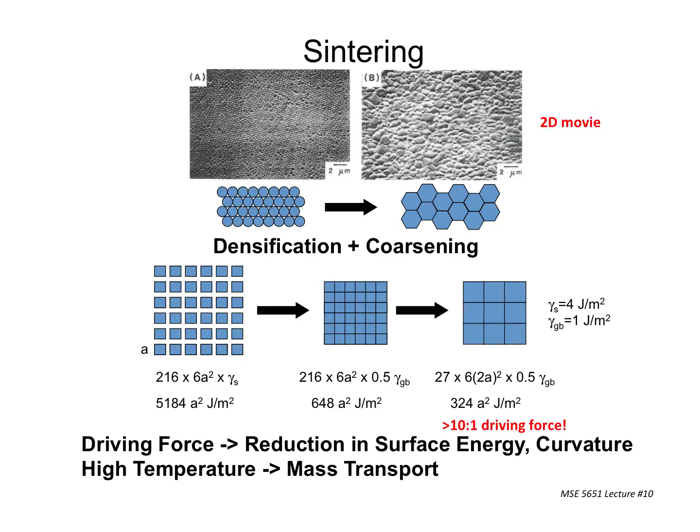We'll talk about some examples of that. But first, I'm going to talk about the driving forces again, in case you're at all unsure about this. This is an array of what's called Stober process spheres—tiny silica spheres made by a particular chemical process. As you can see, they're all the same, and they're all really tiny, which is pertinent to what we're talking about in this class.

They're pretty much close packed. If you have the right level of dispersion—and we all know about dispersions now and how we achieve them—you get these types of arrays of really tiny silica particles, and you can use this to make synthetic opal. If you're ever so inclined to make jewelry this way, you can. Opal is a similar thing; nature makes it and it takes a really long time, but we can do this synthetically.

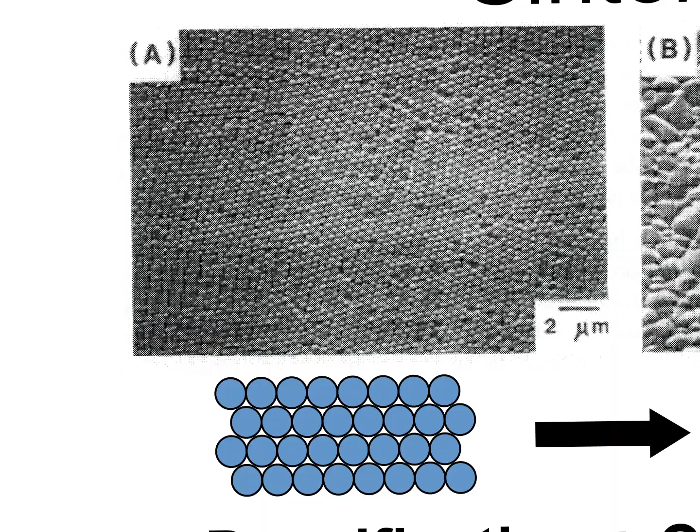The reason I show you this is that we have this close packed array of particles. If anything, this should give you what you'd expect, which is the equilibrium distribution of grains—you get six-sided grains in a perfect close packed array of particles. But in reality, you don't get that. You get this instead.

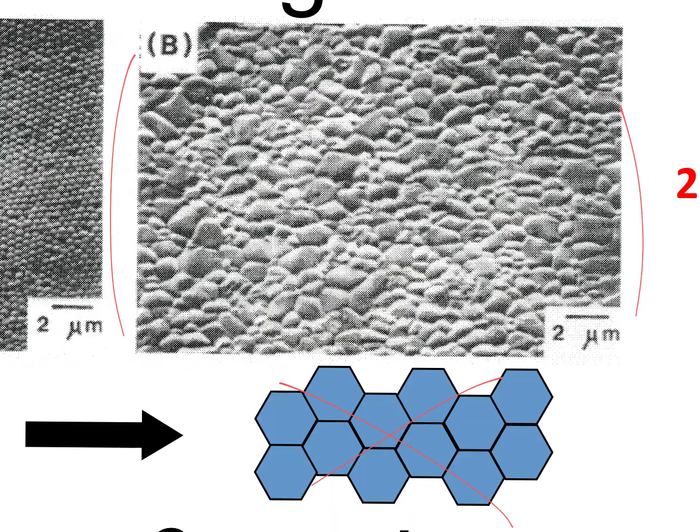As you can see, it's the same story. Now you've got several things going on. First off, you're not getting six-sided grains. Secondly, the grains are all different sizes—they didn't start out that way, but they certainly ended up that way. Some are bigger than others, so they're starting the process of gobbling up the little guys in this microstructure. So even if you do everything perfectly, starting with spheres and heating them up, you're not going to get what theory might tell you—you won't get six-sided grains, and you'll still have lots of grain growth because not all grains are the same size.

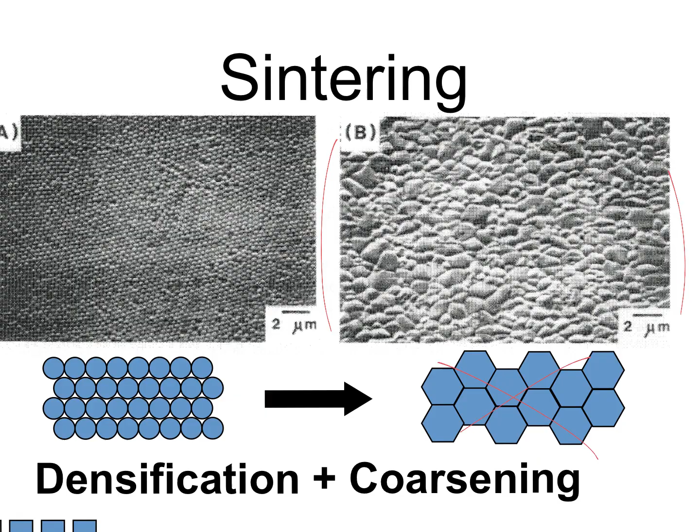That's just an inherent part of the process. What's driving all this is a thought experiment: we have a 6 by 6 by 6 array of cubes, totaling 216 cubes, and each cube has an area of 6a squared, 6 sides.

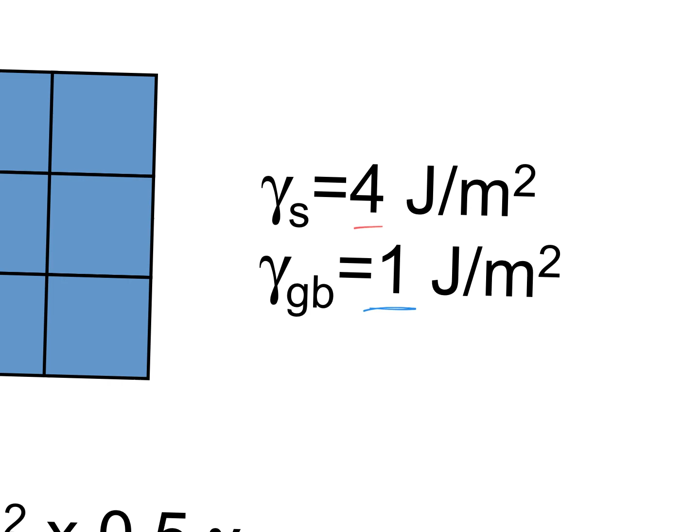We think about gamma as the driving force. For this experiment, gamma for the surface itself is 4 joules per square meter, and for the grain boundaries, 1 joule per square meter. These are realistic numbers in terms of how things scale in real processes. So we start with this array of cubes, and gamma sub s, 4 joules per square meter, is the driving force for this 6 by 6 by 6 array.

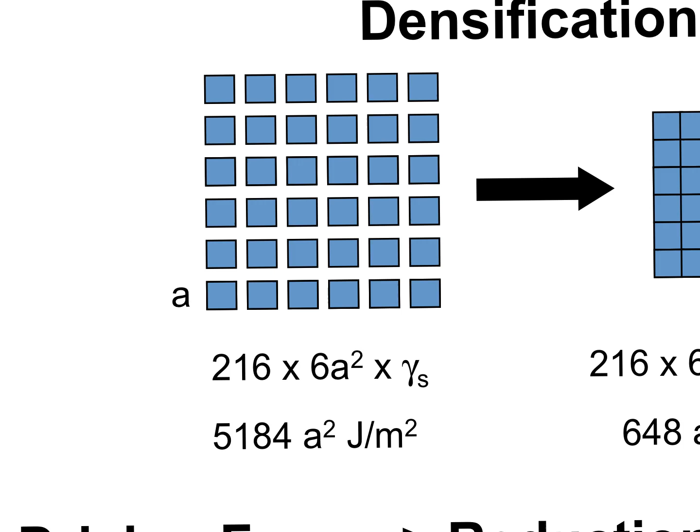If we look at the math in terms of a squared, it's 5,184 joules per square meter. That's just sitting there floating in space—the cubes aren't touching each other.

Now we bring them together, making an assembly instead of individual floating cubes. We still have 216 cubes in this array, and they still have a surface area of 6a squared. But now we're not looking at gamma sub s anymore.

Gamma sub s has been replaced by gamma GB. We made these grain boundaries by putting the cubes together, and we also have half the surface area because now they're sharing those a squared areas.

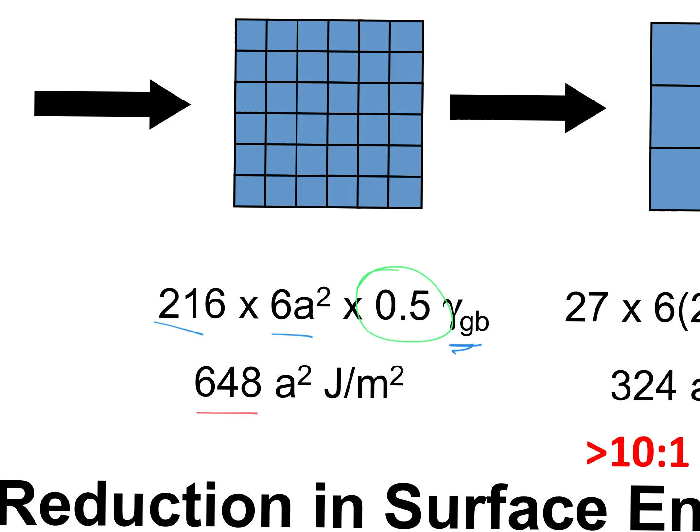That has allowed us to go from 5,184 down to 648. So we've already dropped the surface area quite a bit just by bringing them together, going from solid-surface-vapor interface to grain boundary interface, where two grains face each other across this interface. We've done no grain growth in this simulation—there's a huge driving force just to get rid of surface. That's what this is about.

Then we finally allow grain growth to occur—I put it in quotes because they're still cubes, which is unrealistic. But now you've got a 3 by 3 by 3 array instead of 6 by 6 by 6. So we've made this 27 times 6 times 2a squared, because now they're twice the size of what they were before.

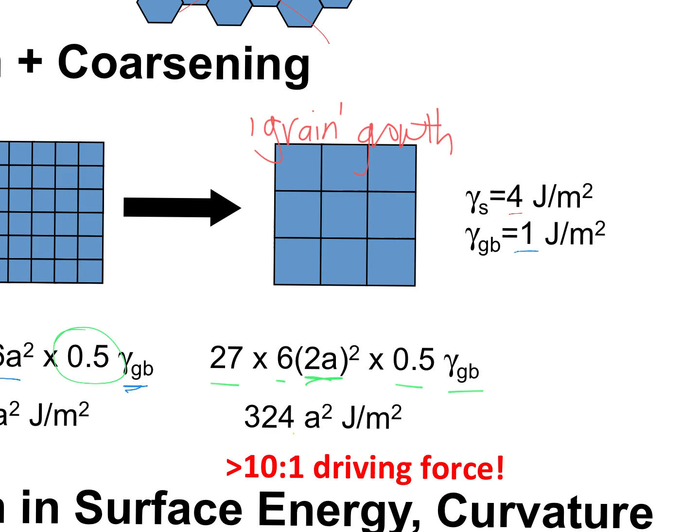Still 0.5 times GB, and it's now 324 a squared joules per meter squared—actually a 16 to 1 driving force, more than 10 to 1. So there's a huge reason for this transformation: first, a huge reason to become grain boundary interfaces rather than surfaces, and then another driving force to eliminate those grain boundaries and reduce their number in the system.

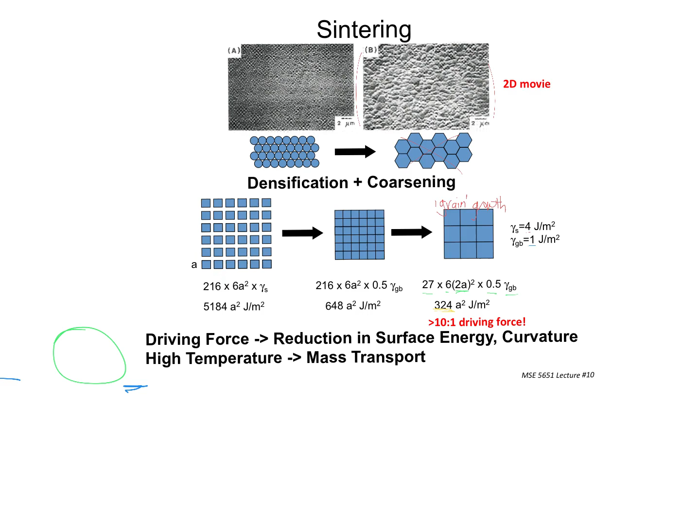This is what drives the process forward: reducing surface area, curvature, and high temperatures allowing mass transport, allowing grain boundaries to grow as they jump across that concave-convex barrier, and grain growth is achieved. This gives you a good idea of what happens in these systems, and it is energy driven.

An example: if you take some of these nanoscale arrays and drop them in a furnace at 1500 degrees, their temperature will go above 1500 degrees because you're liberating all that energy, showing up as a temperature increase of the mass. It's a terrible way to make a ceramic, but it shows there's energy locked up on these surfaces, and that energy can be liberated when you undergo these microstructural changes.

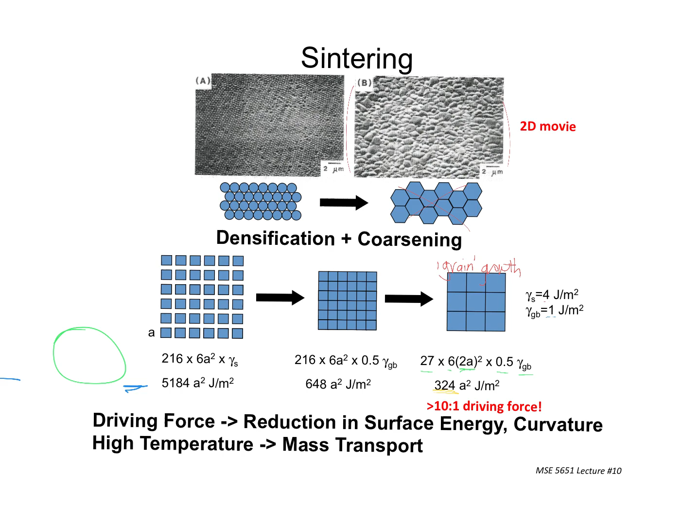Any questions about that? That should all make really good sense at this point, hopefully.

To review, we know there are different pathways for this—this is the classic three-sphere Ashby diagram, involving vapor transport, surface transport, and transport within the solids themselves. The one additional wrinkle is dislocations that are moving things around. In ceramics, dislocations are of no importance whatsoever, except maybe for MgO or something like that.

But it's just one more pathway to move atoms around. So this is what we're looking at, and we're really concerned about this center-to-center distance, the center of the joint between the two, and what are those distances, and how can we make those distances shrink. We want the spheres to come closer together, which means the whole thing is now densifying.

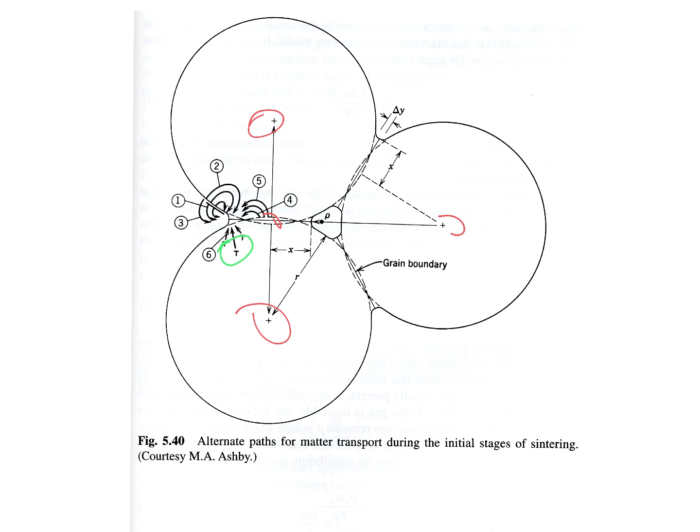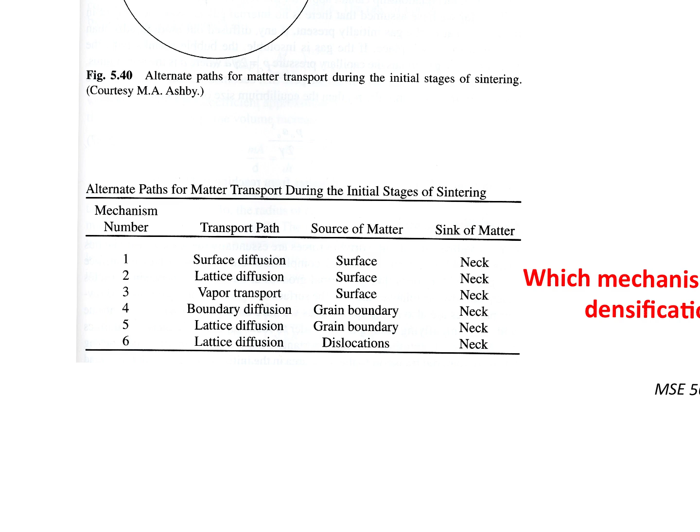What we've got is a series of mechanisms, 1 through 6: surface diffusion, lattice diffusion, vapor transport, boundary diffusion, lattice diffusion, the source of the matter and the sink of the matter. The sink for all of them is a neck. You want to put stuff in that neck to take advantage of the fact that it's a concave area. We have 6 of these — which mechanisms actually allow for densification?

Anybody want to guess? Or which don't? Maybe we'll start there, it's an easier thing to answer. Which don't allow for densification, which don't lead to densification of those 3 spheres?

Which number? Give me a number. 2? Okay, yeah, so 2 does not allow. You're taking it from the surface and you're transporting it to the neck, but you're not shrinking the space. So you're taking surface and putting it into the neck area. All you've done is made that surface smaller, but you haven't caused the spheres to come closer together.

Does that make sense? So on that note, we also have surface diffusion from the surface, so it moves along the edge here and ends up in the neck. It's happening all over the place, but none of those are causing the centers of those spheres to come closer together.

And the same thing is also true for vapor transport. If it goes out into the vapor and then sits down in the neck, that's not causing those spheres to come closer together. You're eroding the surface, but you're not bringing those crosshairs closer together. Does everyone see that? The only ones that work are 4, 5, and 6.

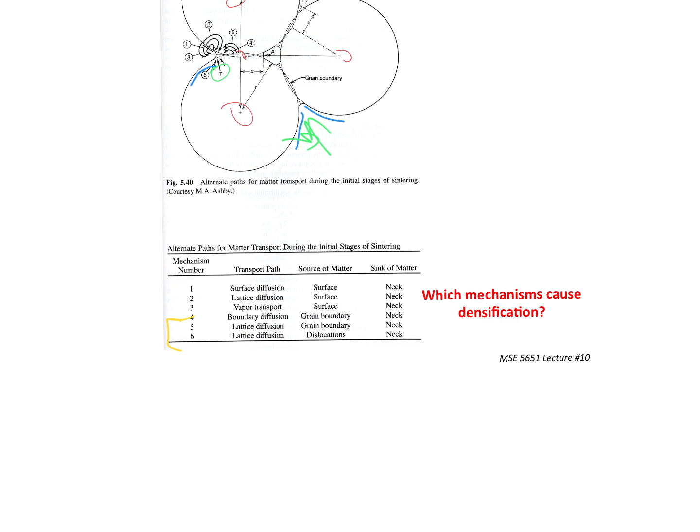So we're diffusing along the grain boundary, and in doing so — let me go back to this overall picture and clean this up a little bit — diffusing along the grain boundary, which has just been formed, and you're going to that neck.

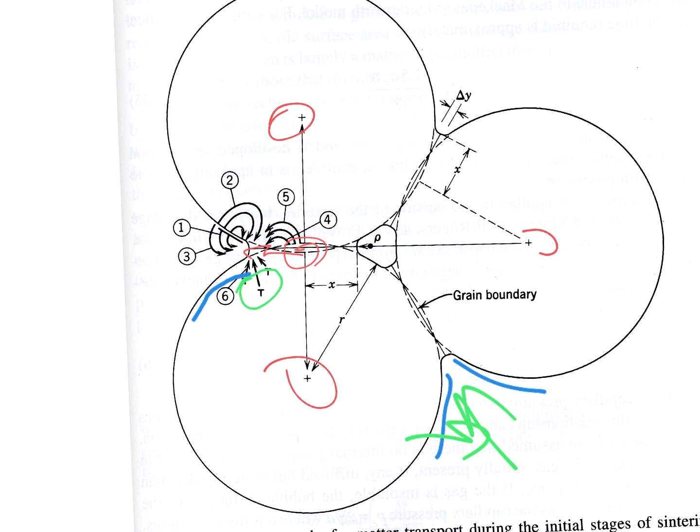You're taking atoms away from that space between those crosshairs, and so now these X's are getting close, the crosshairs are getting closer together. You're just shrinking that distance, and that's an efficient densification rather than inefficient densification. So everyone see that, hopefully? It's just a matter of getting atoms out of that space between those crosshairs.

The same thing is true for lattice diffusion, because it's going from the grain boundary along the lattice — meaning solid diffusion, volume diffusion — and going to the neck. We also have this weird one, dislocations, which also allow for transport toward the neck area and removing matter from the pathway between those 2 crosshairs. Does that all make sense?

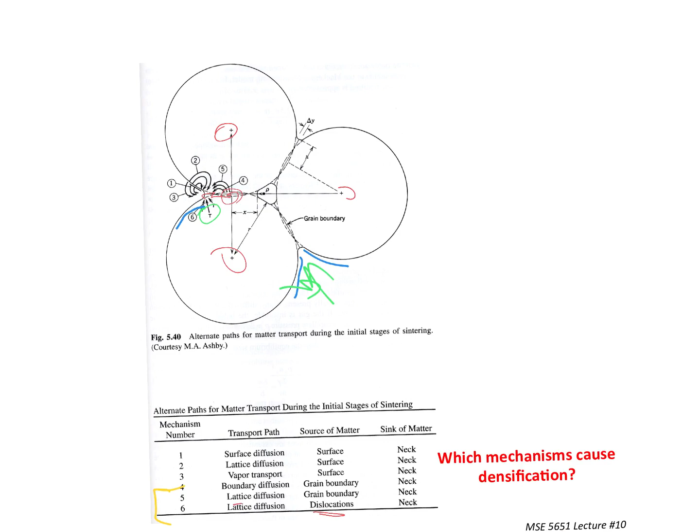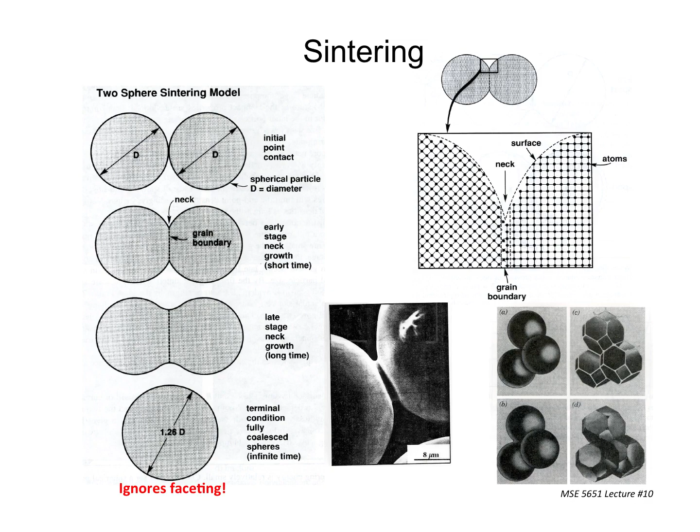So not everything that's going on in these systems is achieving our goals. It's achieving its goal, but not achieving our goal of trying to minimize the energy of the system. There's a bunch of different ways of looking at this, and the only reason I'm inflicting this 2-sphere model on you again is to show you that, remember, they touch, the neck forms, and the grain boundary also forms.

If each of these particles is a single crystal, then there's only one grain boundary. If each of the particles is multicrystalline, which is kind of normal in the scheme of things, then you have many grain boundaries forming as those necks form. So it may not be just one grain boundary, but the point is that this is where it would like to go.

It wants to take all that matter and eliminate that surface area as efficiently as possible and turn everything into one darn big sphere.

Do they still teach about spherical cows in physics? No? Not talking about spherical cows? Okay, all right, anyway, it's one of those interesting discussion items — if cows were spherical, anyway.

And you can see this — you can see the initial stages of this. This is in some particles when they're nice and round, you can see the neck form when they contact. With ugly ceramic particles and ugly metal particles, it's hard to spot these necks, but when they're nice and round, you literally see exactly what you expect to see from these cartoons.

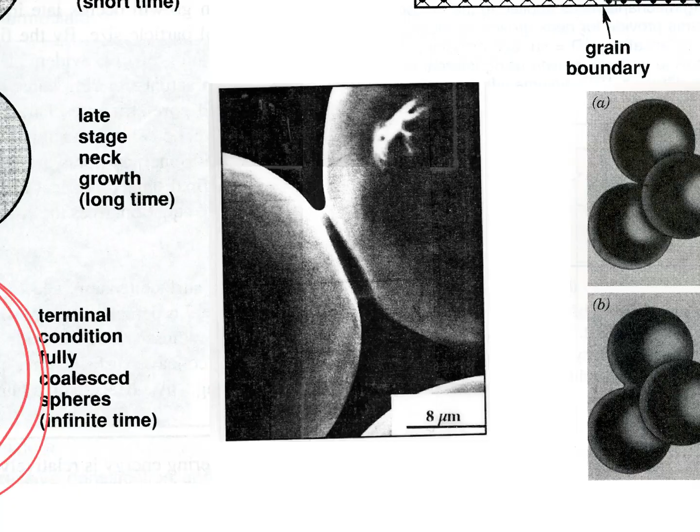Keep in mind that if each of the particles is a single crystal, which is not always the case but does happen, you have one lattice with atoms arranged in one 3D array looking at a second lattice arranged in a different orientation. It's the same crystalline lattice of the same material, but because they're oriented differently, you must have a grain boundary show up between them as soon as that neck forms. Make sure you are totally aware of that.

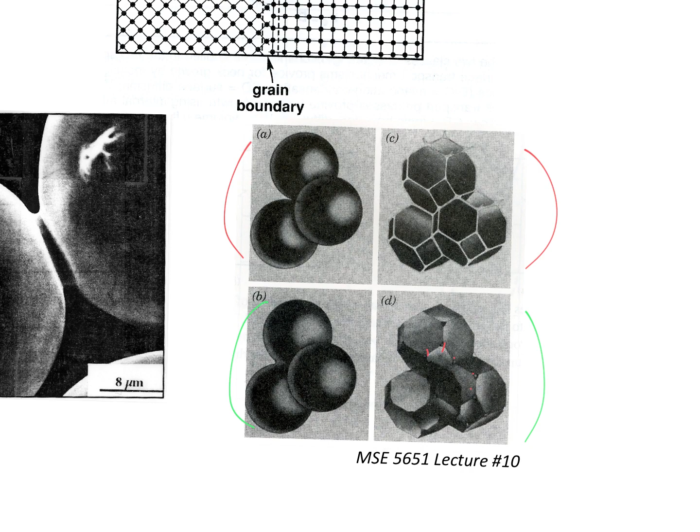We could look at this in 3 dimensions, and you sort of saw this in the simulations. As they first touch, they form those grain boundaries and start to move toward each other, and then later on, as they form more and more of these interfaces and become more mature, you start to see the pores that remain in these different vertices. That should all be kind of clear at this point, hopefully. Any questions about that?

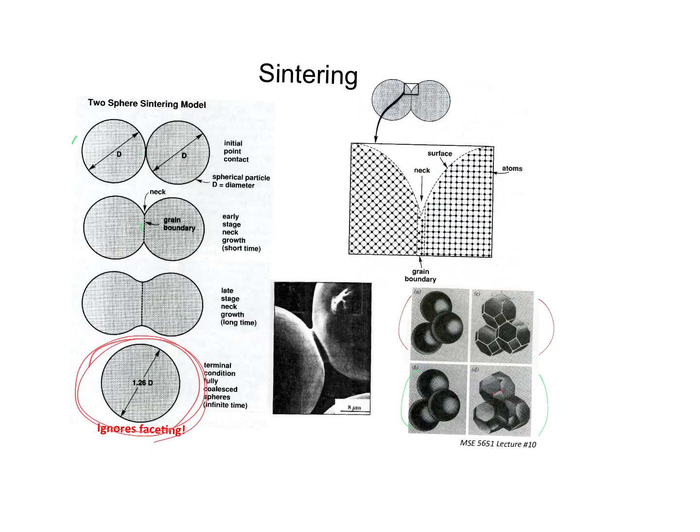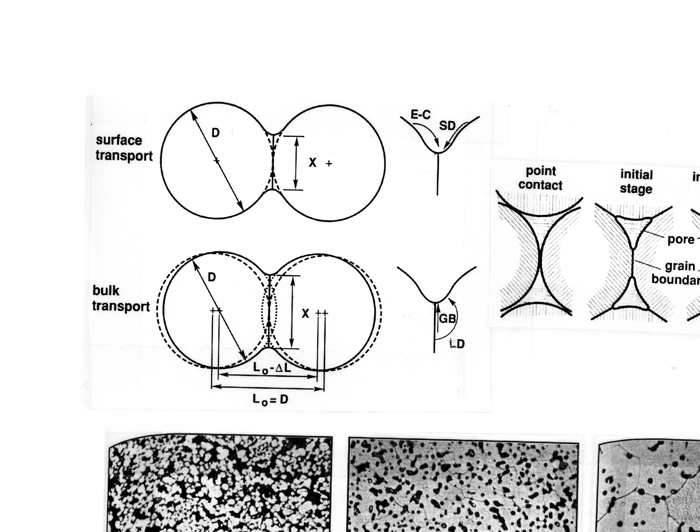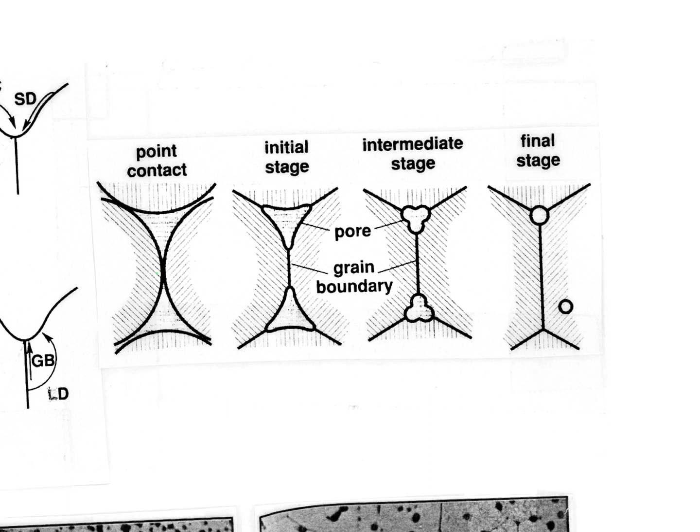And then we talk about a couple of other things. So we have this surface diffusion and grain boundary diffusion and lattice diffusion, all of which are going to the same place, moving atoms around. And getting a little more advanced here, we have the initial point contact where they first touch, and it gets rid of that point contact as quickly as possible to form a grain boundary, which replaces gamma sub s with gamma GB.

The system likes that. And then the thing that is the macro scale here is that all this is going on. What happens to the system in terms of the connectivity of these pores? We know that initially all these spheres are surrounded by empty space, and we form a grain boundary, but we still have this empty space. And that empty space consists of tunnels that go all the way to the surface.

The beauty of that is, as this thing starts shrinking, as this distance finally decreases, then the air, or whatever atmosphere it may be, turns into our enemy at this point. So we're trying to get this air out, because the air is what sits inside those pores. You want to try to get this out, and when these pathways, these pores, are continuous, it's like squeezing a sponge - air comes right out, no problem at all.

But then, you'll see this somewhere around here and certainly there, those pathways to the surface get cut off. Everything keeps shrinking and shrinking and shrinking, and eventually the pores are isolated. Then that nice pathway of just squeezing the sponge and getting the air out stops. At this point, diffusion rears its ugly head. So we can no longer squeeze the sponge - we have to rely on diffusion to get this out. Diffusion, again, is slow. We don't always think of diffusion as slow, but there are different types. And a couple of things can happen.

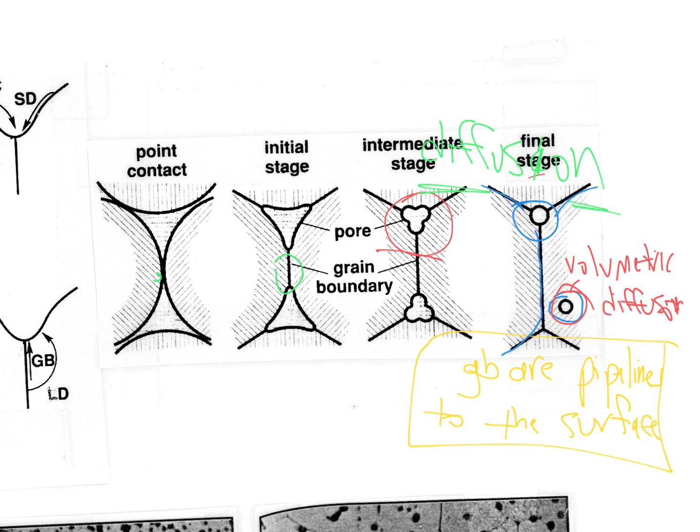If you recall, I showed you this image. We like the fact that it does that - it allows us to get these gas atoms out more quickly. But if a grain leaves a pore behind in the middle, we're stuck with this annoying volumetric diffusion, which we don't like.

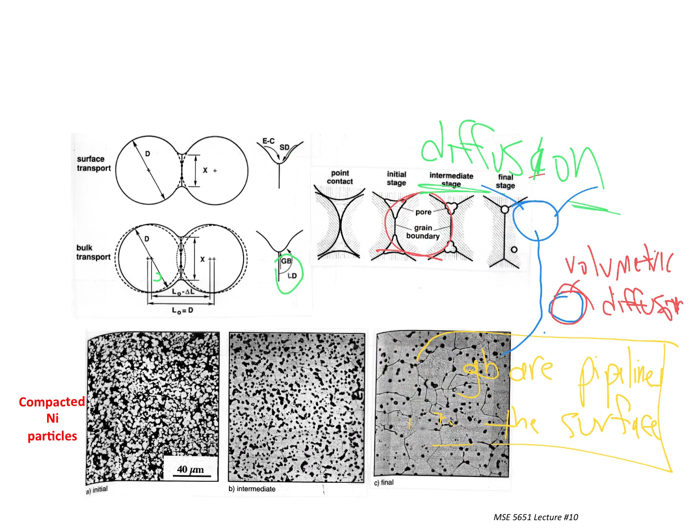It's very slow, very expensive, high temperatures, long times. Your boss is not happy - you're spending more money on energy costs than you should be. That's a big driving force for a lot of operations in this area.

This is showing an example, and it's a very easy one. Unlike ceramics, you can take nickel and a lot of other metal particles and squish them in a die. You pop it out, and it's this shiny metal cylinder. You can throw it against the wall, and it doesn't break because it's these nice metals - they're so easy.

But if you cut that nickel compact, you see there's still plenty of pores. It's not water - it doesn't squish out all the porosity completely. It leaves lots of pores behind between those original particle interfaces. And if we start heating this up...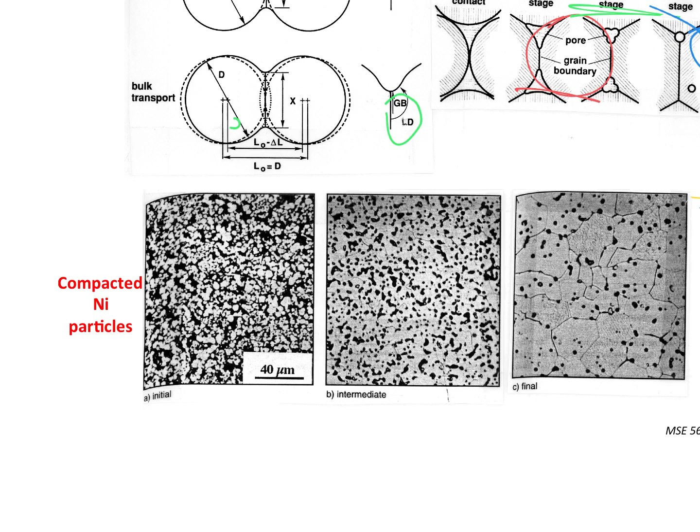A couple things: you can see we've got lots of pores left, and you can also kind of make out grain boundaries - the lines that constitute them. This is all indicative of grain growth that's gone on. These guys started a certain size, they've grown, and you've got pores left too, all that dark stuff. Where you want those pores to be is on the grain boundaries, and it's kind of hard to see here - you occasionally make out a grain boundary, but there are lots of dark pores.

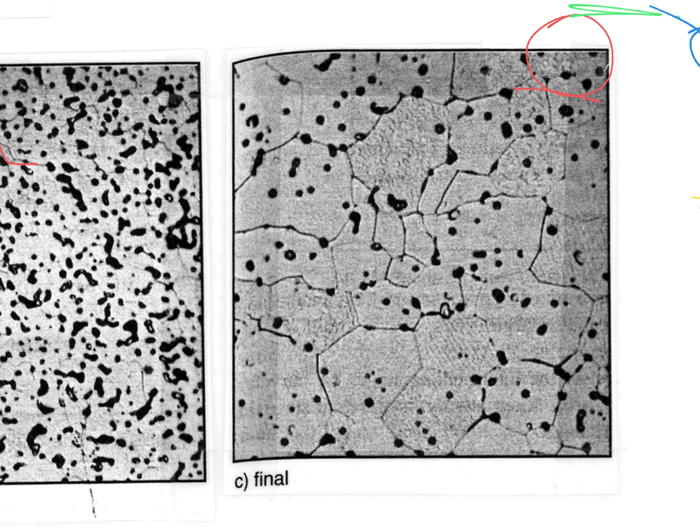As we go toward what they call the final stage, that's where you see success and disaster. You see some pores sitting on the grain boundaries, doing what they should do, diffusing their contents toward the surface, but then you have others that have gotten trapped inside the grains. If you let this sit at temperature, the pores on the grain boundaries will disappear, whereas the pores in the middle of the grains will still be there - you'll still be able to see them.

You want grain boundary surface area, as they call it. If you took this thing and blew it up into all the different grains, you'd have a certain surface area associated with that collection of grains. You want that to be as high as possible, meaning you want the grains to be as small as possible, so you have as many pathways to the surface as possible, to get the best densification you can possibly get.

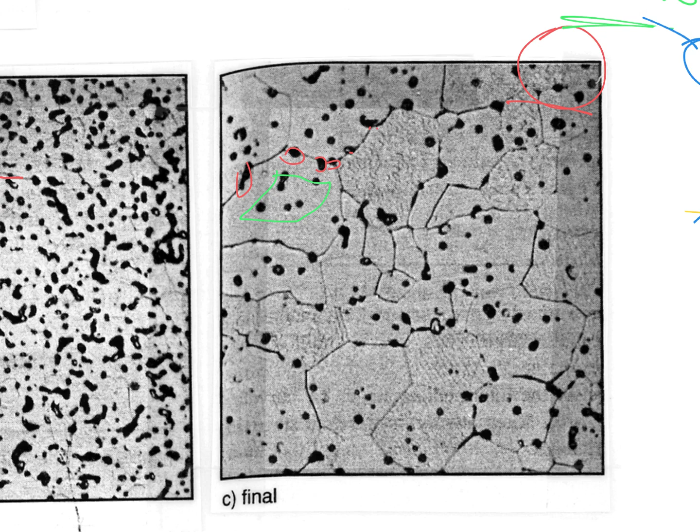The whole process of grain growth frustrates that because it gets rid of grain boundary surface area - it eliminates it, all in pursuit of minimizing gamma GB. That's the way it is - the system does that. We know how to slow it down, but in many cases we can't stop it.

So we have to think about grains with pores inside them, interior pores, versus grain boundary pores. If two pores are sitting there and we come back later, you'll see the grain boundary pore gone because it diffused to the surface along that pipeline, as I like to call it, showing just how efficient it is versus the interior pore, which might still be sitting there in the same microstructure, because it's stuck with just slow volumetric diffusion.

Think about this in terms of grain boundary surface area - it's another benefit of small grain sizes. If we can keep our grains submicron, this whole process of eliminating pores becomes much more efficient, meaning our defects become smaller or hopefully absent - no pores at all is what we're driving at. In most cases we're not fully successful, but making grains small makes the pores small, and you try to resist grain growth, which fights our desire to escape this entrapment issue of pores inside the grains. Any questions about that?

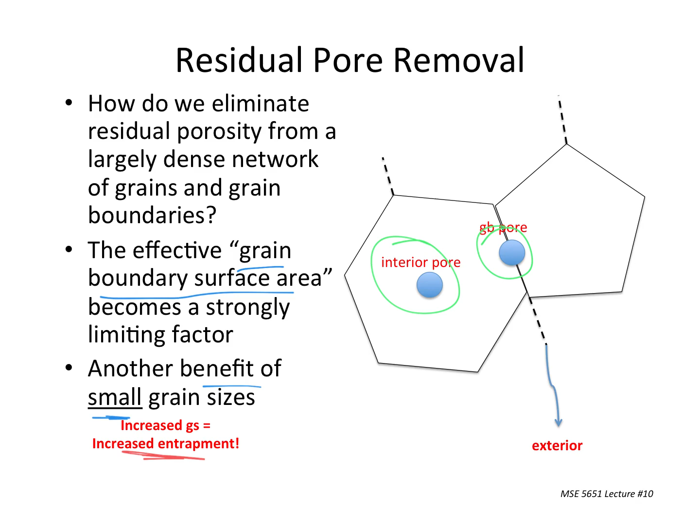There's this I just feel obligated to show. There's a thing called Herring's scaling law.

Herring looked at two particle characteristics: the radius of the particle, and this variable x2, which is the distance from the center of contact to the edge, meaning it starts to diffuse out and get away from this whole area. You look at that ratio of x to r, and it's supposed to give you some idea of the degree of sintering in the system.

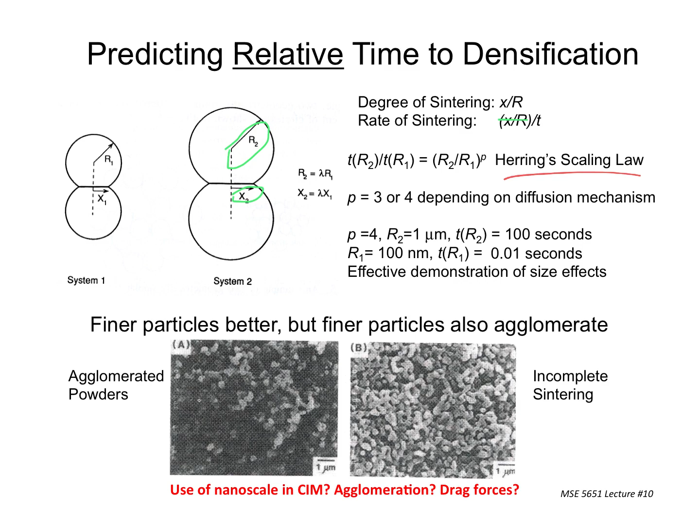If you do that as a function of time, you have x over r, x divided by r divided by t, that gives you the rate of sintering. So the larger x is, the faster the rate of sintering is. That's all part of this process.

The whole point is he developed a law, and there's been a huge amount of activity to make it predictive in some way, and it all failed spectacularly. But anyway, Herring's scaling law says that the time of sintering for two different particle sizes is equal to this ratio of R2 to R1 to some value of P, 3 or 4 depending on the diffusion mechanism.

The point is that if you have R of 1 micron, the time of sintering is 100 seconds, whereas if R1 is 100 nanometers, the time of sintering is only 0.01 seconds. So this law becomes useful in terms of providing some useful simulation of the time involved when these diffusional processes are happening.

When R is small, and you guys saw this in that hot stage microscopy video, if you look closely, it's all at the beginning. When you start with these initially small particles, they almost disappear instantly, and you see grains show up that are way bigger than the original particles.

So that's what's going on: the small particles grow instantly almost and become larger particles, and then the rate of change slows down a lot because the particle size now is larger.

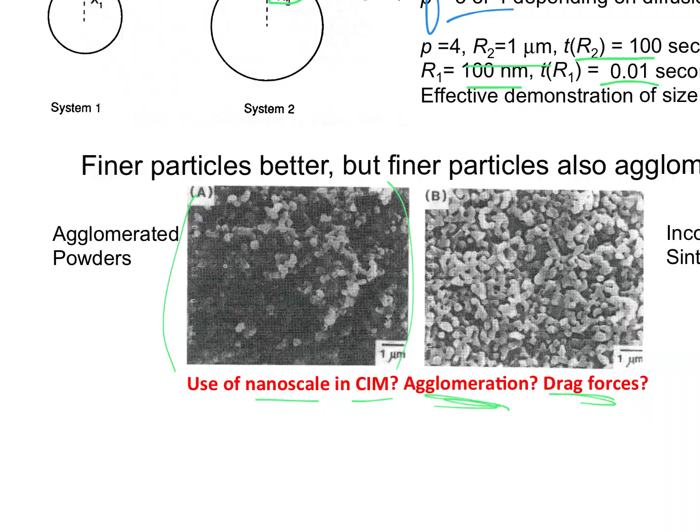We've formed the compact, we remove the binder, you guys know about that now, and we start to sinter it. I just want to make sure you see: we form the necks, and it starts to look like a sponge at this point.

All the particles are gone, they're all glued to each other. A lot of the porosity that was still there is still there, so this is still a sponge-like structure, and the air will come out easily. But it won't take long for this to start sealing off those pathways.

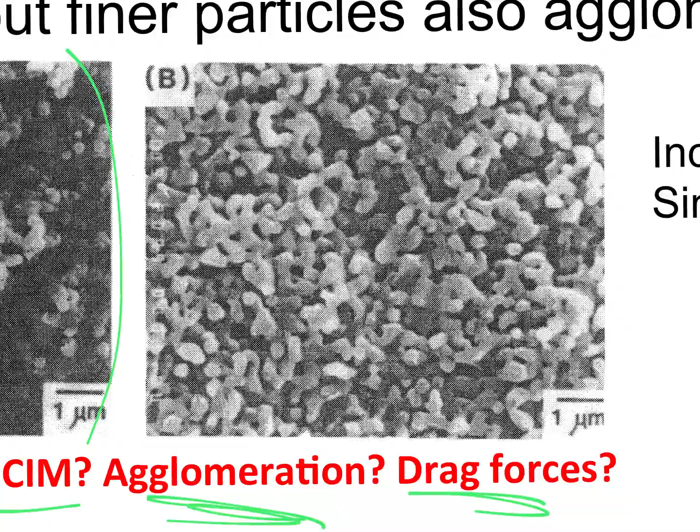Providing barriers to further densification in these systems. But we have to engineer this thing on the left-hand side, and then hopefully what happens on the right-hand side is more efficient because of how we engineered it. That's why we spent so much time talking about that, because if you do a good job on the low temperature stuff, the high temperature stuff will take care of itself.

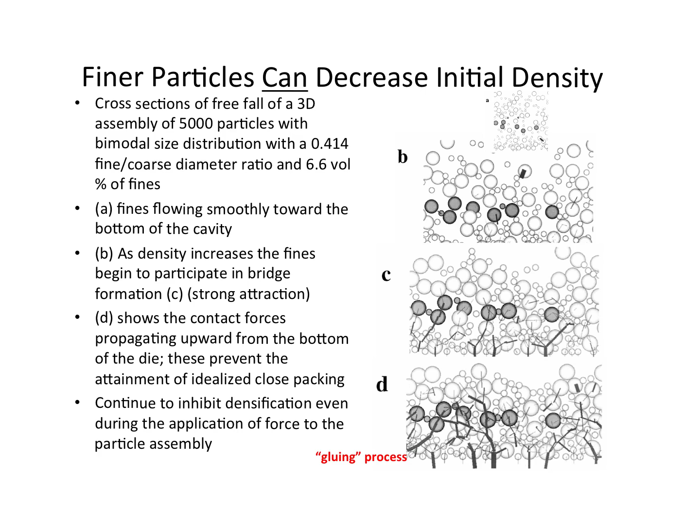The one consequence of the fact that we're dealing with these different particle sizes, deliberately different particle sizes, is that the fine particles can be difficult.

If you've got something that consists of large particles and small particles following roughly this 1/7 rule, then they start to form bridges with each other, and these bridges start to prevent motion. So if we're applying force, which is what these lines represent,

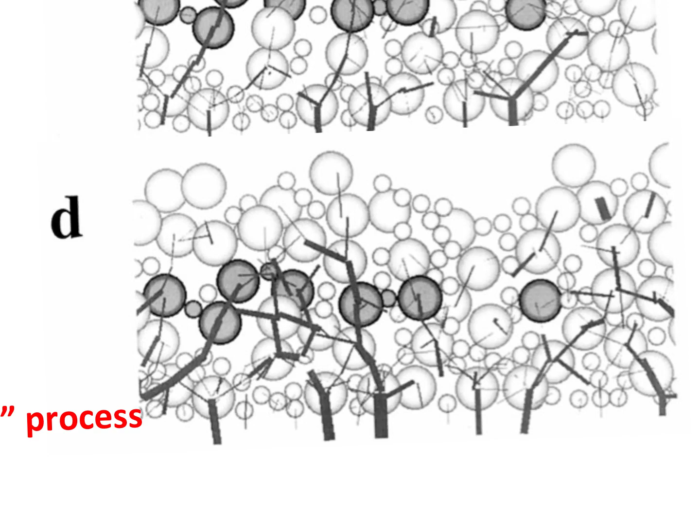Then that force becomes more difficult because the presence of these fine particles helps glue everything together and make motion more difficult. This is an additional challenge we faced because of the fact that we created this 1/7 rule and we try to follow it.

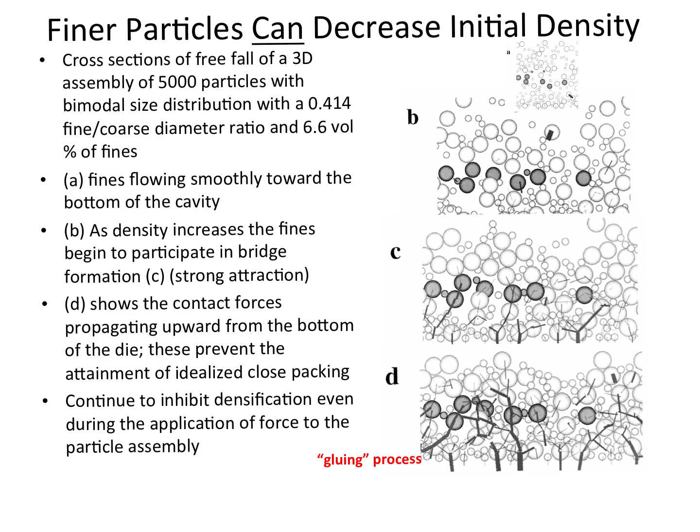So a lot of this is like, well, we had a set of guidelines, we did the best we could, and now we have all the consequences of these things that we developed, trying to give ourselves 80% dense solids, but now we have all these little bridges forming because we made these 80% dense solids. So that can be a problem.

Before I move ahead here.

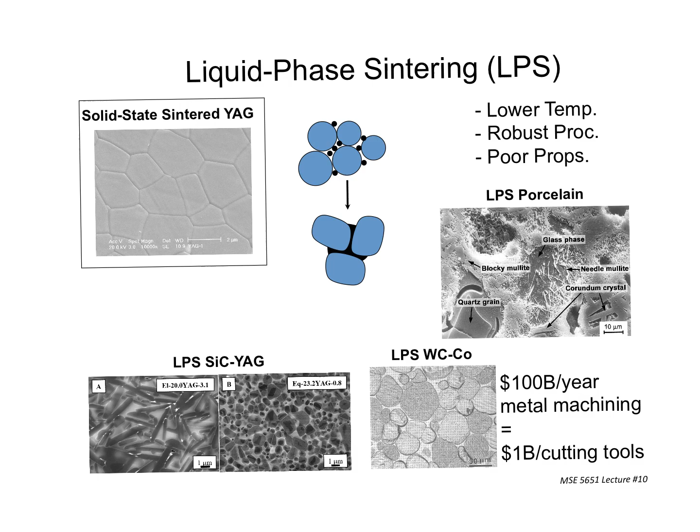So this is showing you solid state sintered yttrium aluminum garnet. Let me know what that's used for.

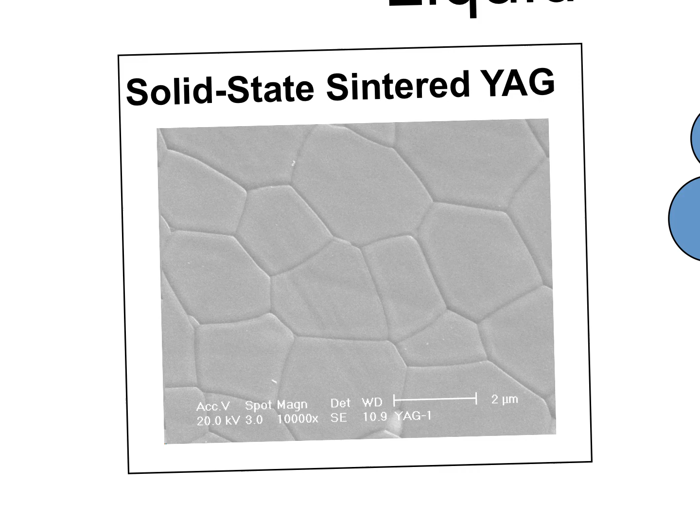But anyway, this is a very useful system, and you like it to be pretty darn dense because lasers work better that way, when they don't have pores stuck inside of them. So you can use this to densify these things.

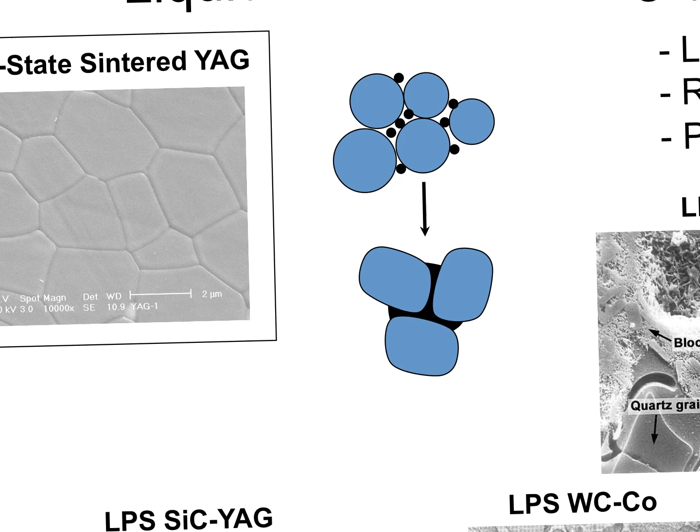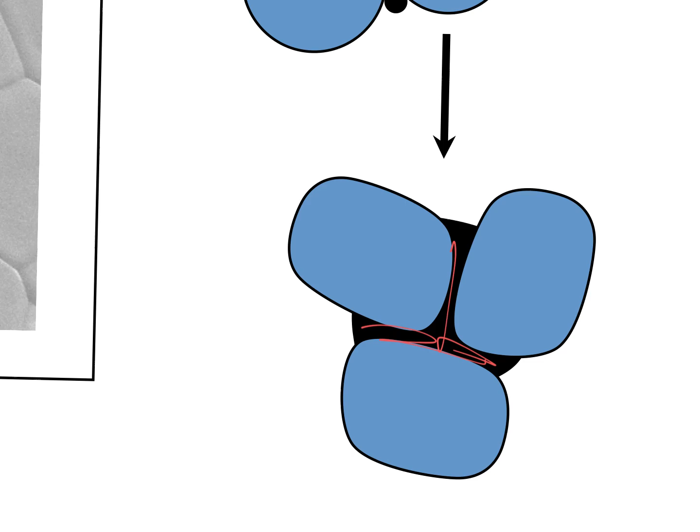That is hard at work giving us improvements in densification. You get this process of densification at lower temperatures because you're not relying on vapor phase transport anymore. Now you have liquid phase transport, which is way more efficient, and you have liquid phase, which doesn't go away.

So you have plenty of diffusion going on inside that liquid. We don't have to worry about pathways to the surface because the liquid forms a permanent pathway to the surface. So you can have lower temperatures, robust processes, but of course the downside could be poor properties. It depends on what you consider poor properties.

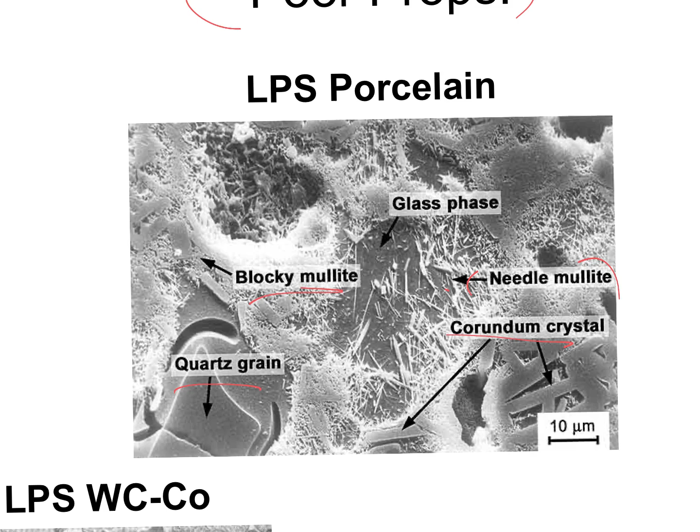The example I always like to give is porcelain. We all live our lives around porcelain in various ways. Porcelain is made by liquid phase sintering of mullite, which is a silicate aluminate, corundum, which is alumina, different types of mullite, and some quartz. All this stuff gets sintered together with a liquid phase, and we spend our lives eating off of it and sitting on it. So it works pretty darn well, even though it's a liquid phase sintered process.

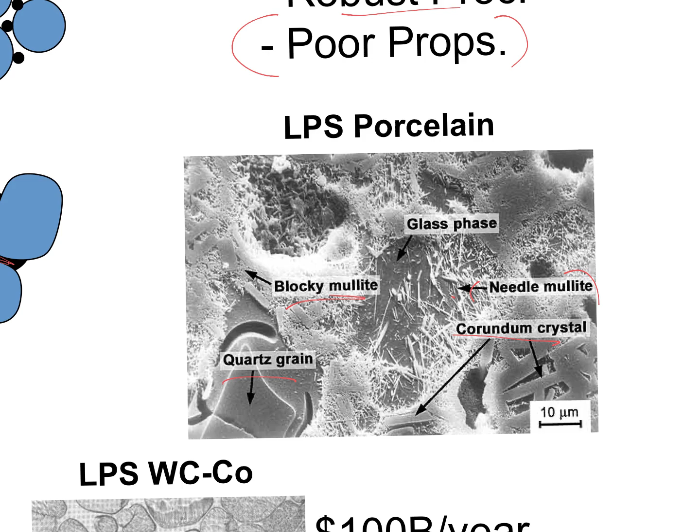Of course, we're not going to put a ton of stress on these things. You're not going to try to stand on your porcelain plate. You know what happens if you do that. So there are limits to what it can do for us.

But there are some stunningly good examples of where it's important. This is one example in which we are working with silicon carbide, and you see here two different compositions involving silicon carbide and different amounts of YAG. I just talked about YAG as a solid state and how it's useful for lasers.

You take that YAG, you heat it up a little more, it becomes a liquid, and you can use that liquid to densify silicon carbide, which is even higher melting temperature than YAG. Pain in the neck to work with, more energy required to densify it because it's got such a high melting point.

This is showing you at a 20.0 concentration of YAG, 3.1, we have these whisker-like shapes of silicon carbide, but if we go to a slightly different concentration of YAG, the silicon carbide has turned into nice grain-like shapes. We like this. This will densify much more efficiently under gravity than the one on the left, so the one on the right is going toward an efficient grain boundary-based structure.

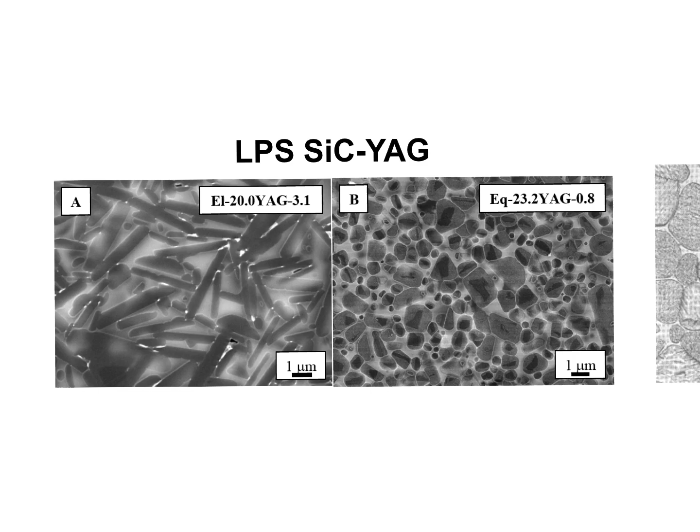We still have that liquid phase around it, so it depends on what you're going to do with this silicon carbide. But something that is kind of one of those hidden things in technology is machine tools and cutting tools in particular. Cutting tools make use of one of the hardest substances known to man that can be commercially used besides diamonds, which is tungsten carbide.

So what you've got here in this image is tungsten carbide particles with the cobalt liquid phase all around them. They've rounded out nicely, transport's occurring, and then you cool it off, and you have this really good tungsten carbide cobalt system that is used to make at least $1 billion a year in cutting tools, specifically for machining titanium, cobalt chrome, and aerospace alloys and all sorts of things.

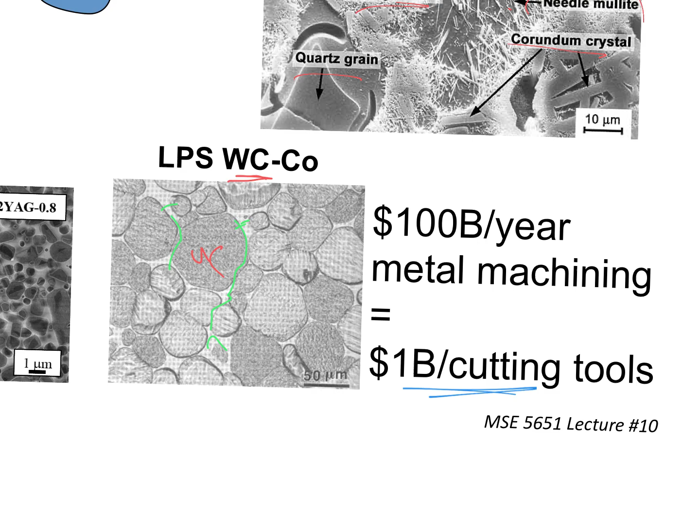Great for that. Tiny little black triangles. If you ever go to a machine shop that's working with that, they have tons of these, and they go through them by the hour. But for machining these metals that are really hard, tungsten carbide is the only way of trying to work with that. I have a video, not today, but in upcoming lectures, in which you'll see one of those things at work. So when it works, it's awesome, but it's not available to everything for everybody.

In most cases, sintering temperatures vary between 1400 and 1650. If you can get there cheaply, that's awesome. Total sintering time can vary from several hours for small parts to several days for really large parts. The majority of this time is taken up in gradually heating and even more gradually cooling the sample. So we always think about sintering as that high temperature point, but a lot of the time involved is that slow crawl up and the slow crawl down.

Initial rate of heating should not exceed a critical limit. So we talk about fast firing, but even fast firing has limits. You don't want to create internal stresses. If the melt needs to form for liquid phase sintering, that takes time. It can be a chemical reaction that takes time to happen. And so all these things need to be considered.

There's the other factor in that we know sintering time at temperature can always be decreased by increasing the temperature itself. So your boss says, hey, I don't like that it takes 5 hours, we want it to take 1 hour. Well, let's crank it up 200 degrees. And yeah, maybe it will only take an hour. But it can lead to excessive grain growth or abnormal grain growth.

That's shown here, where on this side of things, it's okay. But over here, what we've done is we've got this giant grain that's gobbled up all its neighbors, and even worse, it's generated all these huge internal pores. So you can't just throw more temperature and money at it and solve the problem. You can only make the process go so fast.

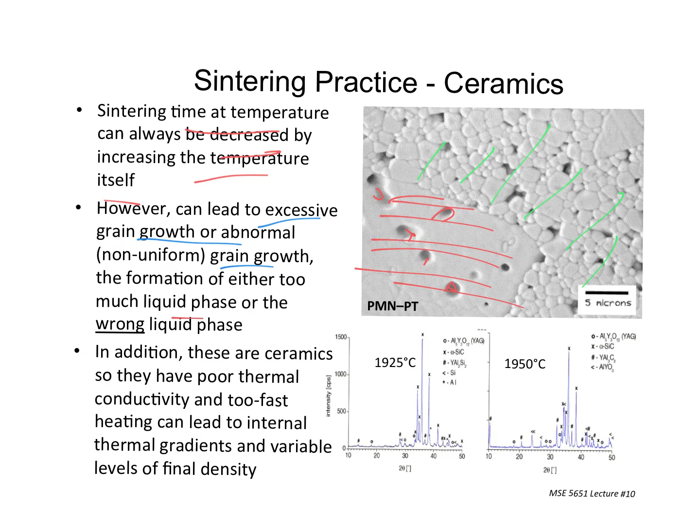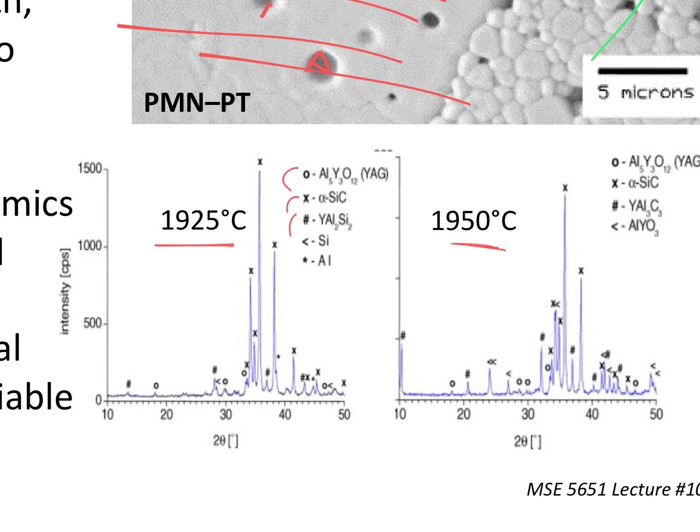And too much liquid phase, or the wrong liquid phase, is shown here. This is X-ray data for this particular YAG-based system involving silicon carbide, like you just saw. At 1925 degrees sintering, we have stuff we want: YAG, silicon carbide, this yttrium aluminum silicide. But if we go just 25 degrees higher, we have the YAG, silicon carbide, but now we've formed this carbon-based compound, and that carbon-based compound dissolves in water.

All right, not a good thing for a ceramic to have something inside of it that dissolves when it sees water. So that is a disaster, and it happens with a very small increase in temperature. All right, so these things are like chemical reactions, these ceramics and a lot of the metals as well.

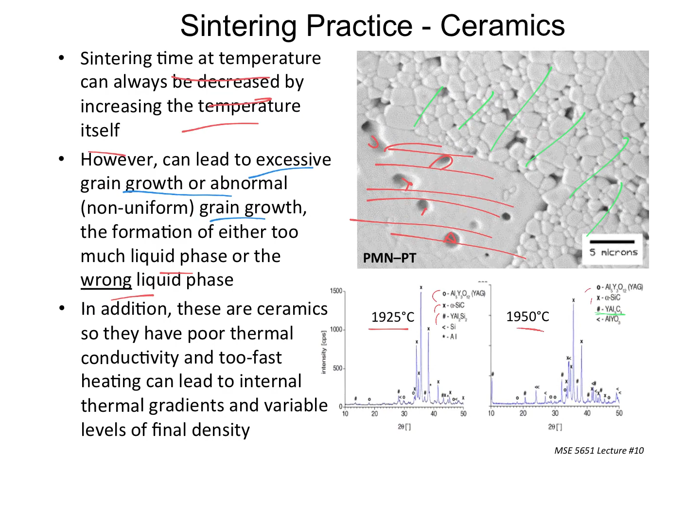Okay, let's see. And we also have cooling issues, which is one of the really annoying things, especially in some large parts, like a lot of these aerospace parts. You can have something that cools up or heats up, and you let it sit there and densify, and then you cool it down, and what happens is, let's go back to those numbers.

Say we're sintering at 1950 C, which is not out of question, and we start to cool it down. So our furnace is now at a relatively chilly 1800 degrees centigrade, because we've shut the furnace off or we started to ramp it down. And so what happens though, ceramics, as you should remember, are lousy thermal conductors. They don't lose heat very well.

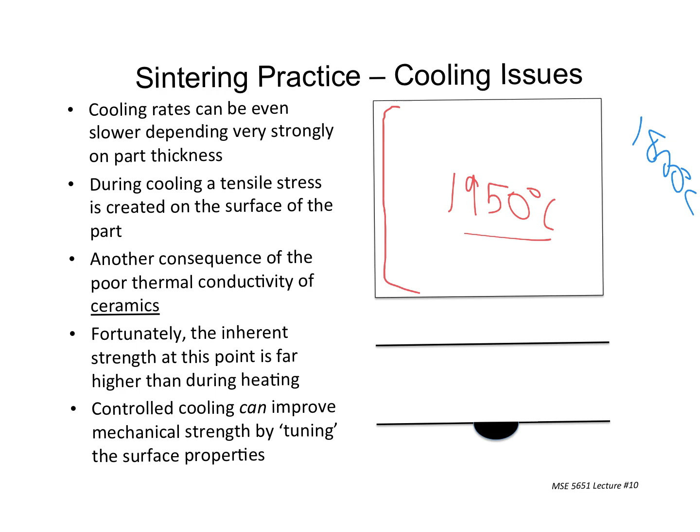And so what will happen is the surface, everything is still, I mean, both of these temperatures are white hot to our eyes. You can't look at this stuff at these temperatures. But anyway, the surface may be, let's just make it 1850, and then another gradient in from there might be maybe in this thin area 1900. But the center is still 1950, because it's a lousy thermal conductor.

And so that means that the surface is trying to shrink, and the center is saying, no, I'm not going to shrink because I'm still the same temperature I was before. And so as that surface shrinks or tries to, that creates a tensile stress on the surface. Again, it's a consequence of the poor thermal conductivity.

And so if you have a flaw present, a pore of any kind or contamination or something, then what you've done is you've created a bunch of thermal or tensile stress. And if that equals 1 here, a nice flat part of the surface, here at the defect it can be 10. Concentration of stress at that defect can drive fracture based on that defect.

So you can quickly cool it down, and then you hear a crack inside the furnace, which means that your part has self-shattered during the cooling process. So you can't go too fast in these systems, no matter what your boss says. You can go slower and end up with product as opposed to not having product.

Everybody get that? The tensile stress development should make sense when you think about it. The surface is shrinking. It has to shrink because it's cooling off, and the interior is not, because it isn't cooling off. And that causes these problems.

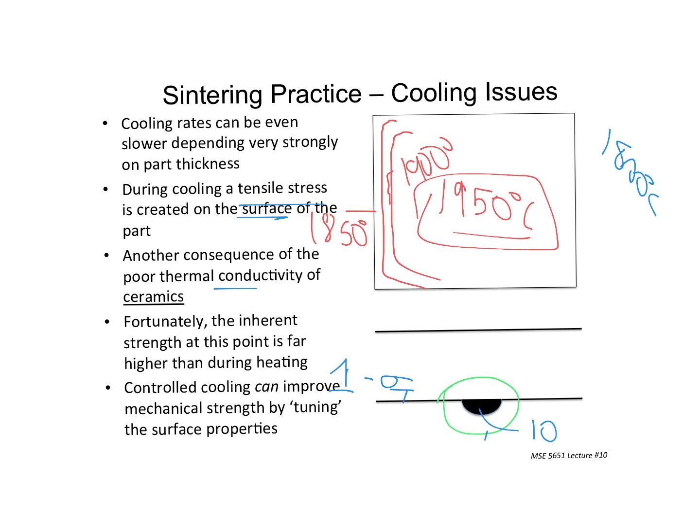And this can interface with things like grain boundaries. And this is where grain boundaries can be a weak point because it can tear apart a grain boundary too, as well as a pore.

So in this context, verification of mechanical performance is very critical here. The things that we like about ceramics, the fact that they're very wear resistant, they don't generate too much particle when they're articulating against themselves. They're very hard, chemically resistant. Alumina, in the body, it doesn't really do much to it.

All those things also make it very flaw sensitive. Presence of defects in the microstructure or on the surface, as we just saw. And we need to get some idea of the mean failure strength of a component under stresses, let's call it uniaxial stress. And we also need to, very importantly, develop a very firm estimate of the inherent variability of these parts.

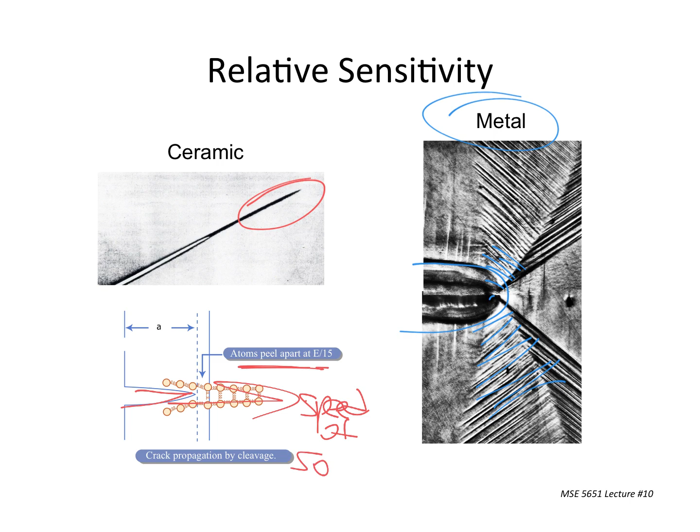You shot all these half planes here and there, but it's still in one piece. It has not failed. With ceramics, unfortunately, you have the very sharp flaw, and these atoms will peel apart at about a 15th of the modulus, meaning this crack gets going and then moves at speed of sound. That's how these things break like glass in vivo, because there's so much energy involved, and there's no resistive mechanism. It doesn't generate dislocations, unfortunately.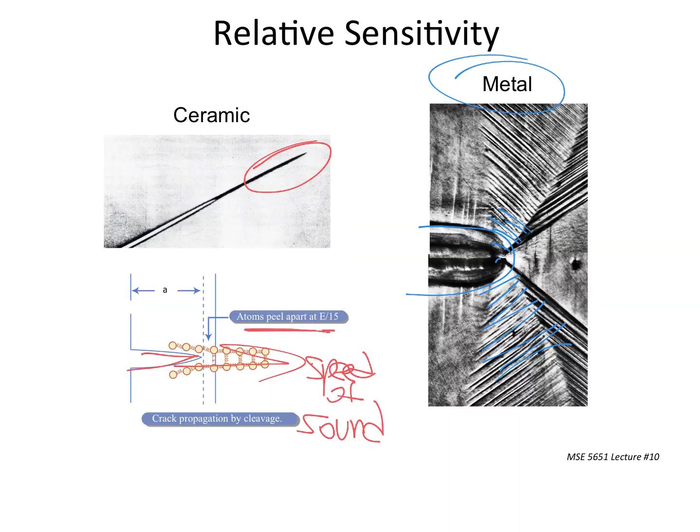And so these flaws, as I keep hammering you with, are deadly, more or less, depending. They literally could be deadly. We have to think about what causes this. We know their flaws: size, shape, location, and size distribution is important. They're not all the same size, some are bigger than others. We look at predicting fracture stresses in the presence of known flaws and machining defects. Remember, we have to shape these things, and so that can also generate defects.

Fracture is far more sensitive to flaw characteristics than anything involving the surrounding microstructure. Final flaw size can be affected by changes in grain size. Solid contaminants can affect the strength. Differences in thermal expansion coefficients between one phase and another in a ceramic can cause cracking. Differences in elastic properties can introduce cracks when a load is applied. We've seen the consequences of that. And the ceramic injection molding connection between processing, fabrication, and flaws is difficult to understand, let alone control completely.

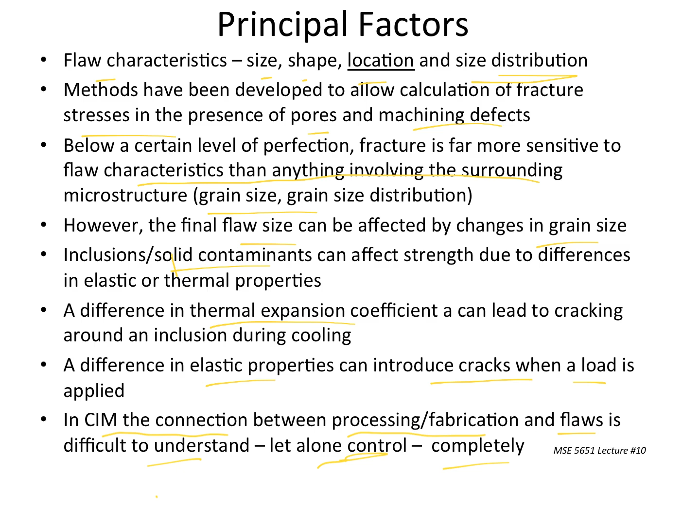So I hope you have the impression that this is a complicated process, densifying these things. It's not like a nice liquid. And so what we do is we estimate.

The process is always destructive. We do modulus of rupture. This is a 3-point bend test. Over here is a 4-point bend test, which is definitely better. We can't really do what is done in metallurgy and make dog bones out of ceramic - just can't do it, it's too hard. But what we can do is make flat surfaces and stress them with 4-point bends and 3-point bends.

And generate these modulus of rupture loads or mechanical strengths for these systems. It's always destructive, meaning we lose that part, but hopefully it came out of the furnace with 100 other sister parts, and what this one destroyed part will do is tell us something about all the sister parts that came through the same furnace. This surface here, we're trying to stress that surface.

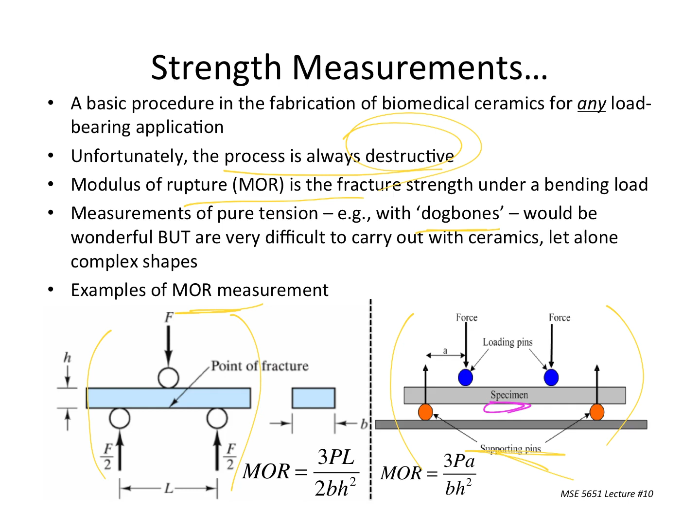Now, it's a ceramic, it doesn't visibly bend, but we know we maximize the surface stresses on it. The strength of any set of samples depends on both the maximum stress and the distribution of stress. 4-point bend tests, because they tend to focus the stress, not just through the whole microstructure but on the surface of the opposing side, give us a better idea of what's being stressed, where the flaws are coming from, and so forth.

And the strength of these components - this is showing you for a couple of different kinds of alumina, different values of strength, I'm going to talk about that. But what we do is we design for failure. These Biolox alumina parts have a failure rate of 0.004%. That means if you get one of these things in your hip, you have a 0.004% chance of that thing failing. So out of 1,000 parts, maybe 4 will fail.

Maybe, okay. And so what we do is incorporate a safety factor. We do a ton of work on modulus of rupture, and we see that the wider the scatter, the less reliable the material is - I'll show you an example of that in a second. So we have 1,000 parts, assume we break them all. Some will have a high strength, some will have low strength. The majority will fall in the middle of that Gaussian.

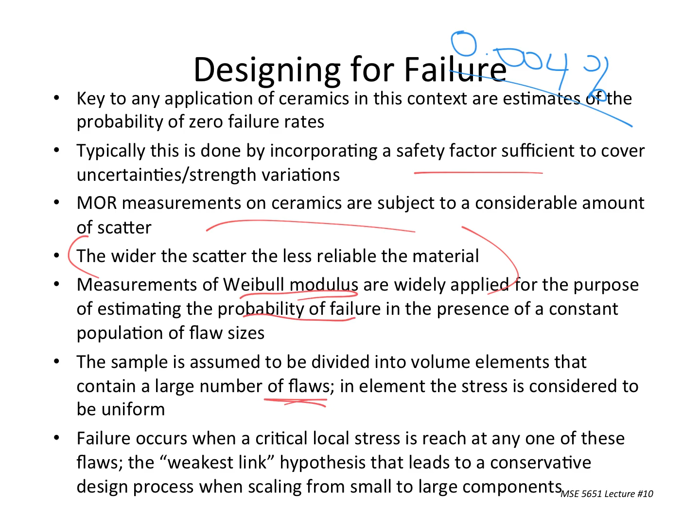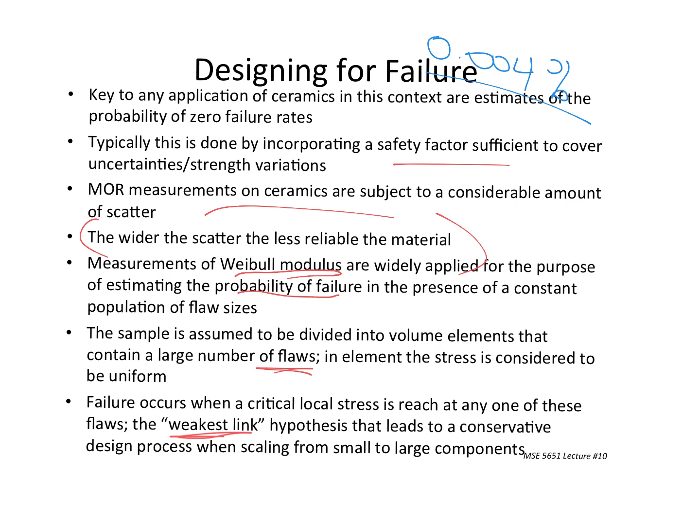And what we do is measure something called Weibull modulus to estimate the probability of failure. We assume there are always flaws in the system - there are always flaws in these systems, grain boundaries if nothing else. And then what we say is the weakest link is what leads to failure. So the largest flaw is revealed, found out, discovered by that stress, and that's where failure takes place, is that largest flaw, wherever it is in this area that's being stressed. And so we have these nice Gaussian distributions, all right? Over here things are good, all right? We like those.

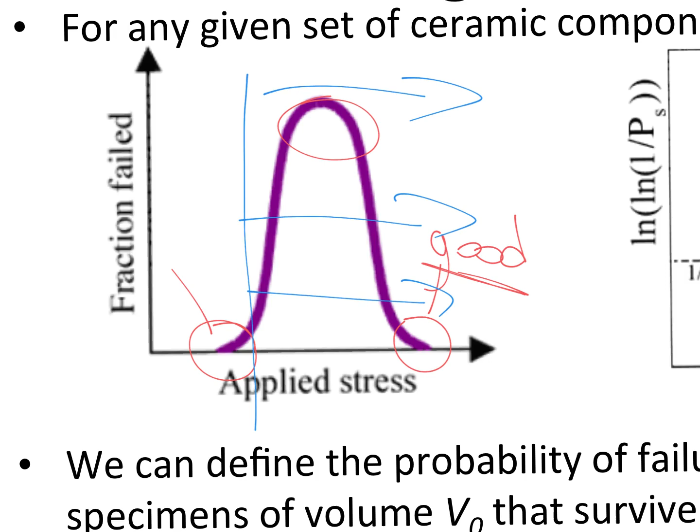Over here things are bad - those are the ones with the 0.004% failure rate, and the majority of everything else is over here on the right. So basically, what we do is hope for everything on the right-hand side, and deal with the consequences of what's happening on the left-hand side. That may mean we assume something's going to fail, and we have legal representation necessary for being sued, essentially.

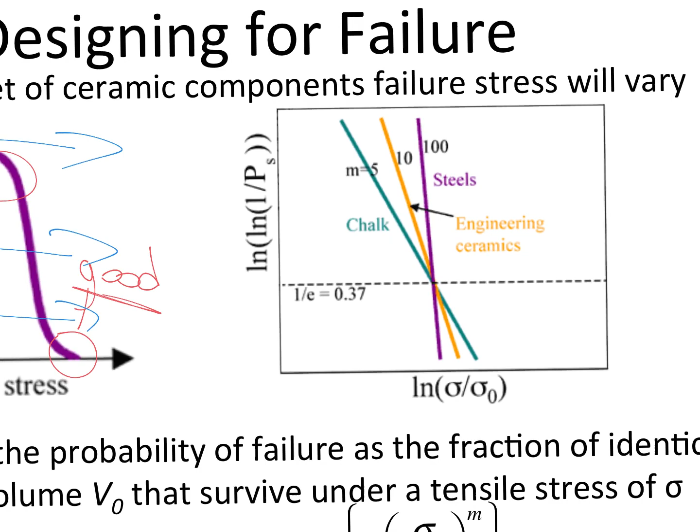It's a very straightforward process once it happens. They'll pay for the cost of the revision surgery and all that good stuff. But anyway, this is just showing you what this Weibull modulus data looks like.

For specimens of volume V0 that survive under external tensile stress sigma, we have this PS equals this EXP value, where sigma sub naught is not actually a stress, it's a scaling factor. These exhibit a slope m, called the Weibull modulus. If we have a lower m, that means we have greater variation in strength.

Chalk, which we don't have anymore in here, is typically about 5. Steel is more like about 100. What we do in the context of manufacturing is periodically reestablish what that Weibull modulus is - we break 1,000 parts, and we see that for chalk it's got a pretty low value. Steel's pretty good because it's got those wonderful dislocations that make it easy. Engineering ceramics are more like 10, and of course the more vertical we can make that data, the better off we are.

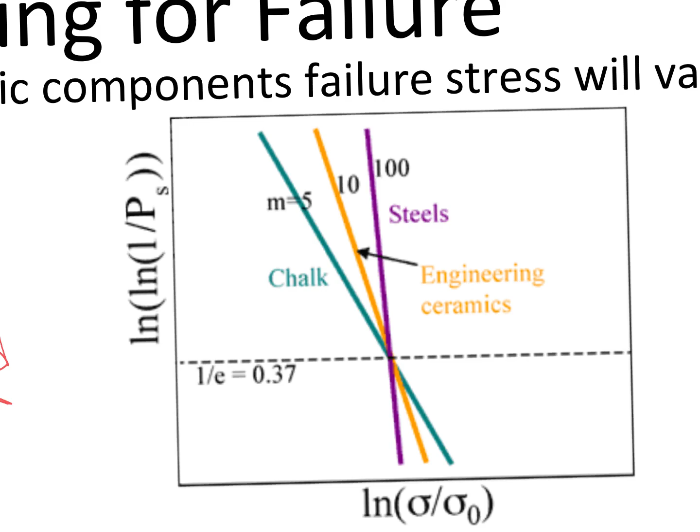This is what we do to figure out what's going on, and you have to redo it every once in a while, because who knows what's changed. Maybe your parts have some kind of contamination, and you don't want to let those go out the door and go into somebody's hips. So you've got to keep doing this over and over again to figure out if we're still at 0.0004% failure rate, or has it crept upward somehow. In the case of zirconia, it crept up a lot.

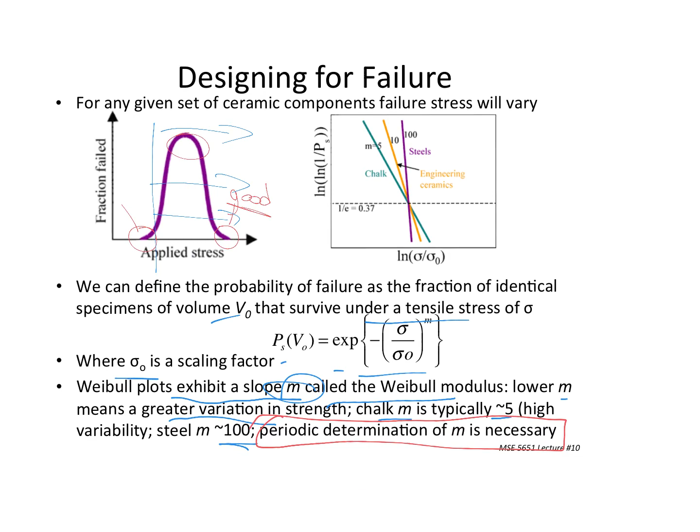We also do NDE, and there are a bunch of ways of looking at this. You can see relatively large defects, and we talked about X-ray CT - I'll show you that in a second. Ultrasonics is one other technique that's been used, usually only able to see relatively large defects, interfacial defects, but it does work. Tosoh SMD down in Grove City has one of these things. One of my former graduate students is in charge of it, Jeremy Gomer. So this can be used to find relatively large flaws.

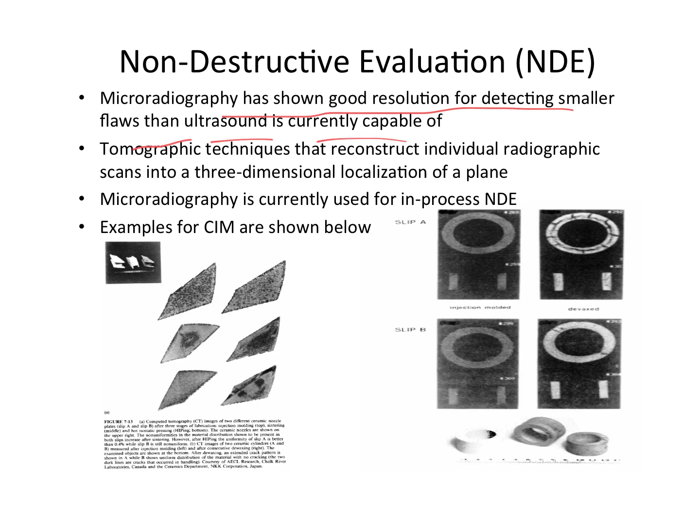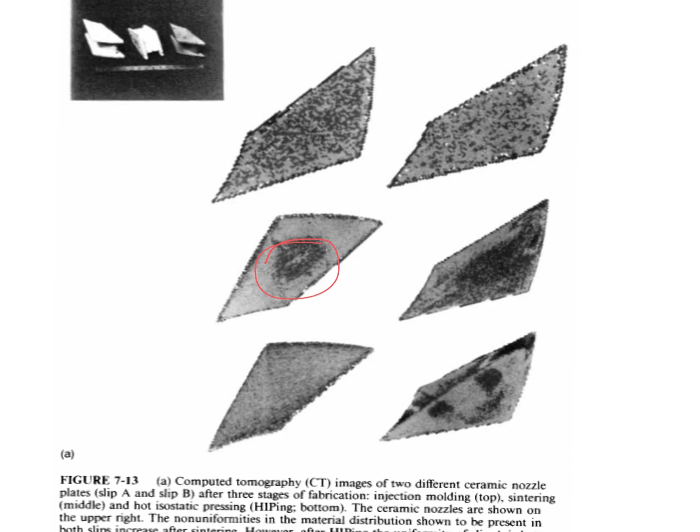We also use X-ray CT, and X-ray CT is wonderful stuff - good resolution for detecting smaller flaws than ultrasound is currently capable of. It's also non-destructive, it doesn't shatter the part like MOR does - modulus of rupture, you have to break the part. But with X-ray CT, and these are some examples of silicon nitride airfoils, you can scan these things internally and get an idea of the flaws, how many of them there are. There's a concentration in the middle of this one, for example, that might be of concern. How that relates to the process is very complicated, but that allows you to look at these things.

This is showing you a couple of injection molded ceramics made from slip A and slip B, which refers to the liquid. They're both injection molded, and you do an X-ray scan on them - they look the same, you don't really see much of anything. But then you remove the binder, de-wax as it says here, and you see a bunch of cracks show up in slip A, and only a couple cracks show up in slip B. So this is the kind of thing you can use to say, well, there's a problem with slip A. We need to go work on that.

So NDE has the potential to solve all our problems, but because we're so good at making flaws small, the flaws are too small for X-ray CT to see. Unfortunately, and that's the dream - to be able to scan every single femoral head that goes out of the factory. But right now we can't do that because we can't see the flaws. They're so small now that the technique can't resolve things that are that tiny. But that would be the goal ultimately, to have no flaws that worry us at all from any part that goes out of the factory.

Until then, we're stuck doing these modulus of rupture, Weibull modulus determinations, knowing that we have variances in the manufacturing that lead to less than ideal values of failure. But predicting that and owning enough lawyers to get you around it when it happens is the current strategy.